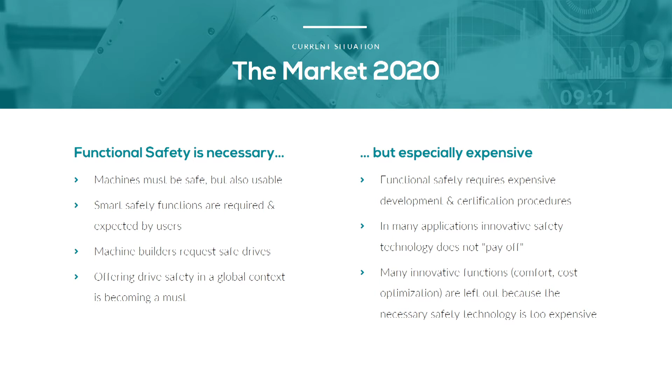The interesting thing is, however, that exactly one standard is used as the base for all of this. And surprisingly, many of those standards are fairly thin in number of pages. They refer to the basic standard IEC 61508. In there, all principles, process schemes, do's and don'ts are described in detail. The similarity of dealing with different applications is huge. This is the basic approach for our following discussion.

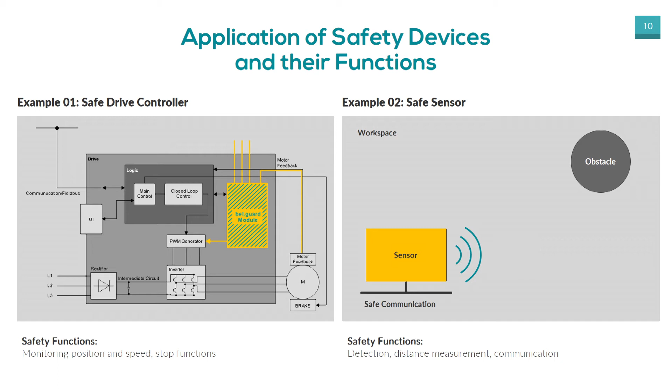In the next example on the right side, we show a safe sensor that may detect obstacles like persons or vehicles in a given area. This sensor is a safety device. It will communicate its resulting signal via safe communication channel to other safety devices like control systems. On the next slide, please. Yeah, I have two more examples.

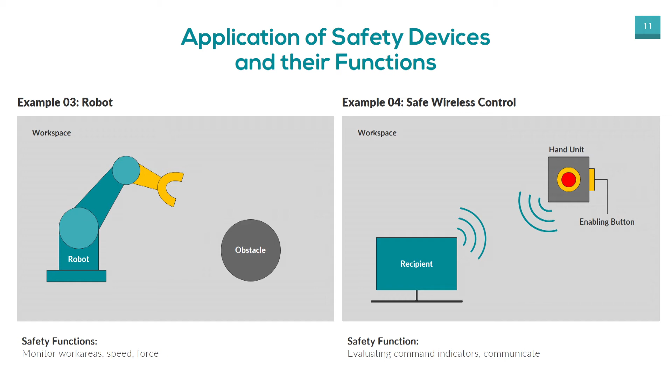Just a robot. A robot may have a static workspace which can be monitored by safely observing the motion of all axes. And on top can use sensors to detect dynamic obstacles, like persons entering the workspace. And last not least, example 4, a small wireless handheld device can safely monitor command elements, push buttons, deadman switch, and the like. The command information is then transferred by safe protocol via wireless communication channel to a control system. As we see, the safety functions may vary substantially. On the next slide, I will show you some common features

of safe monitoring devices. Besides the safety functions, we can find a lot of similarities within nearly every safety device that will read sensor signals, monitor or control a process, actuators, and so on. All the devices that we have seen so far implement these building blocks. We have an input block that receives information from the outside world. This may be a sensing of a physical value, receiving signals from another device. The principles are similar. The input block must not only be able to read the signal correctly, but also must have mechanisms to detect erroneous states or signals.

In the center, we see the safe evaluation unit. This is the core unit implementing the safety function or multiple functions. This block will have its own safety relevant features, for example, checking the plausibility of its own calculations. On the right, we see the safe output unit. Depending on the application, this may be a communication channel to another safety device. This may be the control of an actuator. Again, we will have testing mechanisms to prove the correct function of this unit itself, but for example, also prove the effectiveness of its commands.

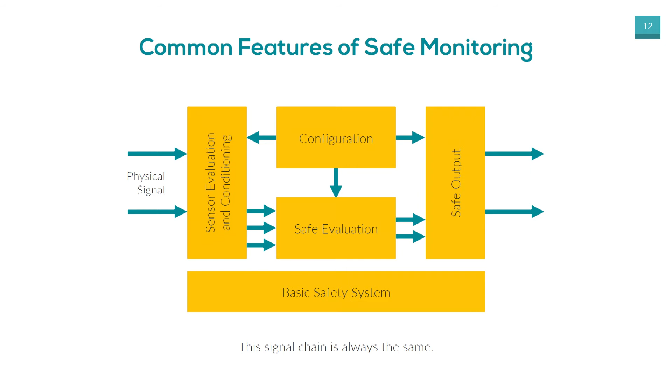Some details of the basic system. It is based on safety hardware. Of course, redundancy is one of the typical features. Besides that, there will be a lot of self-testing, monitoring features required. For example, safe supply voltage monitoring, watchdog, and the like. The basic system also includes diagnostic software, synchronization of redundant processes, cross-communication between process channels, and so on and so on.

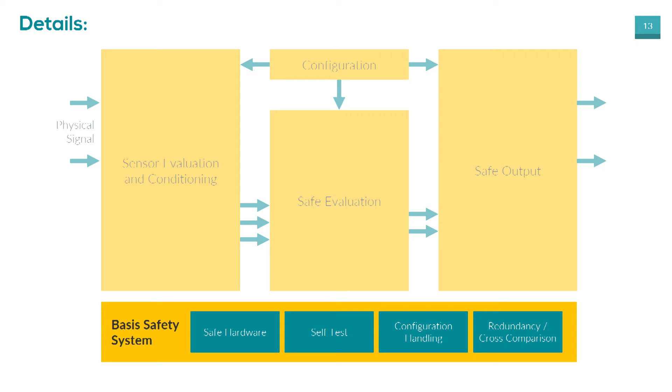The basic system will also provide means for handling the configuration data, like transfer, storage, CRC checking, providing data to the processes. On the next slide, details about the sensor input block. You can see by yourself, we have the physical value evaluation, but also a lot of testing mechanisms. I will go directly to the middle, to the next slide, and go into safe evaluation. Please, the next slide.

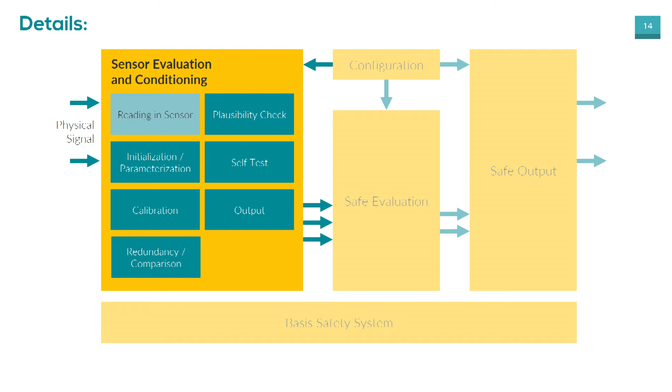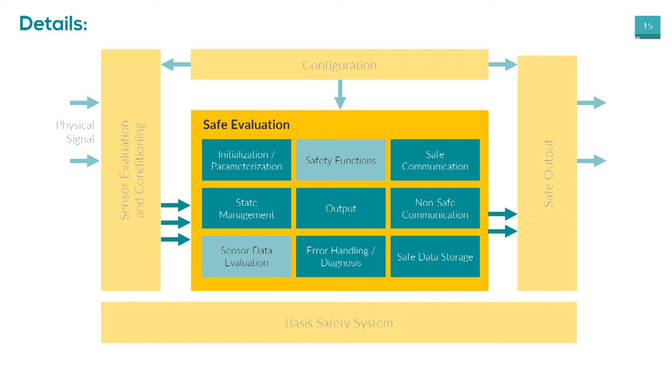Then we have, of course, the pure safety functions, but there will be more functions related to safe data evaluation. Very important is a general state machine that will, for example, manage the initialization of the system. And next, on the next slide, some details of safe outputs. Depending on the type of outputs, we again will have standard safety functionality.

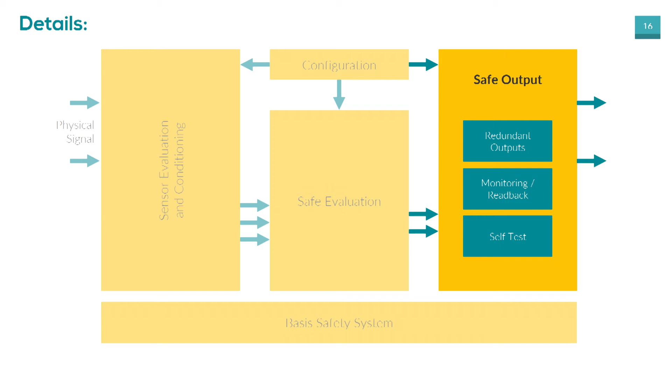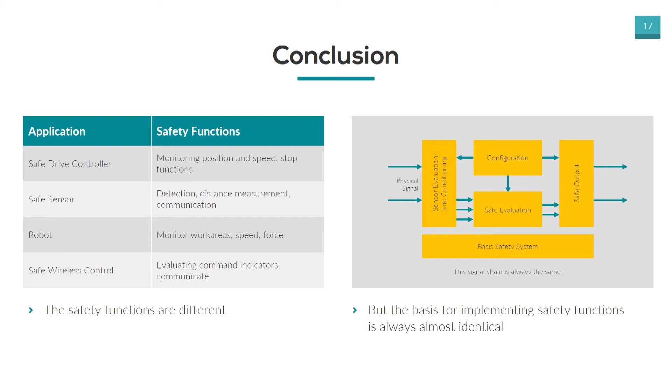Now, on the next slide, I come to a conclusion that most of the functions of the safety device are not directly related to the application. They are more or less standard for every safety device. Not every feature will be needed for every application. But, well, the applications may vary, but the principles don't. What we need is a modular approach. And we will see that on the next slide.

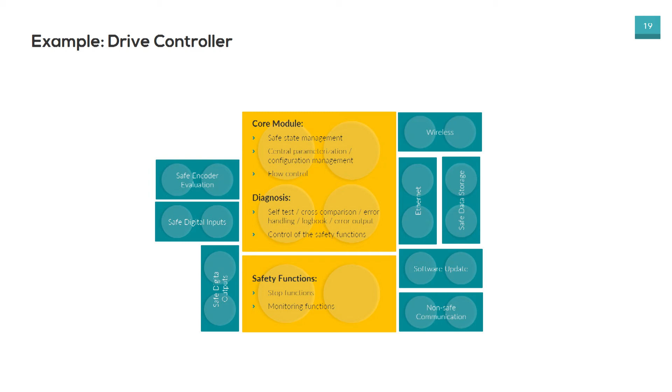If we start with ready-made modules, within a smart module concept, the common modules may be reused in nearly every application. And only satellite modules can be applied according to the varying requirements. We can see some of that on the next slide. Here we have, for example, this drive controller we've seen before. There we will, for example, need safe communication, but we will not need physical sensor data evaluation, and we'll have some specialties. But the core is more or less identical.

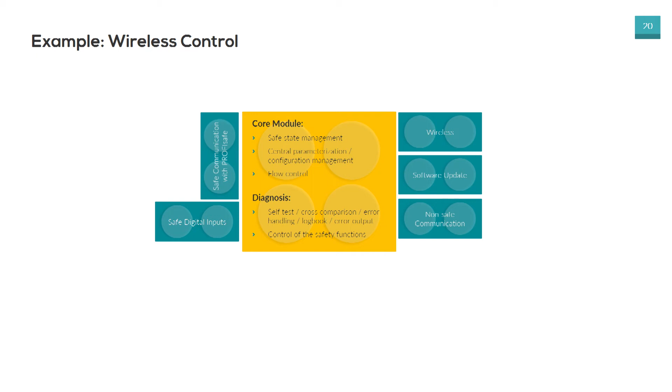On the next slide, we have another example, wireless control system. And again, we have core modules which are almost the same. We can cut some of them off and have some other means for communication. On the next slide, we have a question, why is this so important for us? What is the potential of this understanding? We understood that we have to reach our primary goal, making safety more simple.

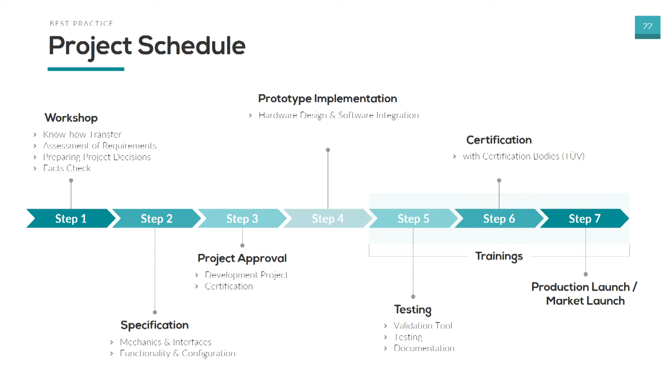And understanding all this, we see on the next slide that not only technology has the potential to be modularized, but also the development process can be brought to the next level. Every safety development project looks nearly the same. And on the next slide, we see how we broke this down. There may be standard documents, standard checklists, standard calculation matrices, comprehensive toolbox for supporting requirements engineering, and so on and so on. This all will cut down development time, development risks, and finally, costs. On the next slide, I will show you one of the interesting examples.

Cobots can collaborate with humans when they are safe. Young companies have brilliant ideas how to reinvent, for example, robot programming. Their success will depend on fast development cycles at affordable costs and low risks. This is just an example where modular safety will do a good job and take away risks, cut down development times, and last but not least, even cut down costs.